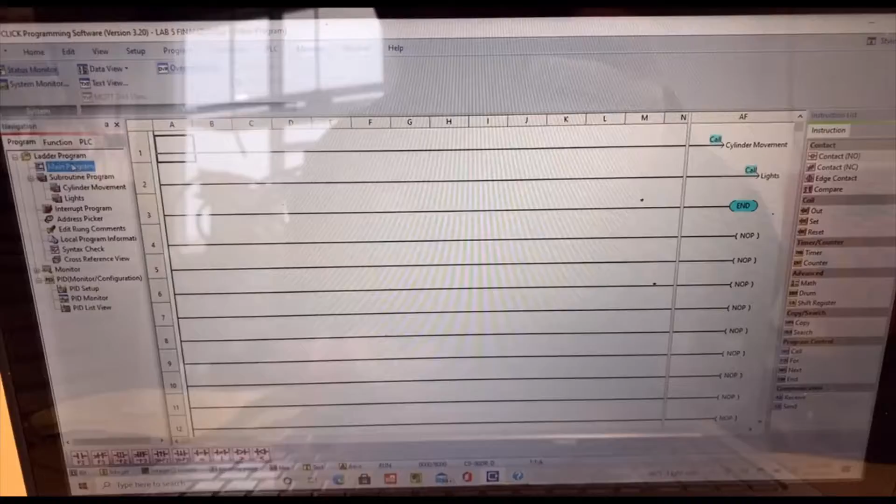This is Mech 160 programmable logic controls. We're going to press both buttons and run the system. Now we're going to look at the code. Our main program just calls both of our subroutines, which are cylinder movement and our light subroutine.

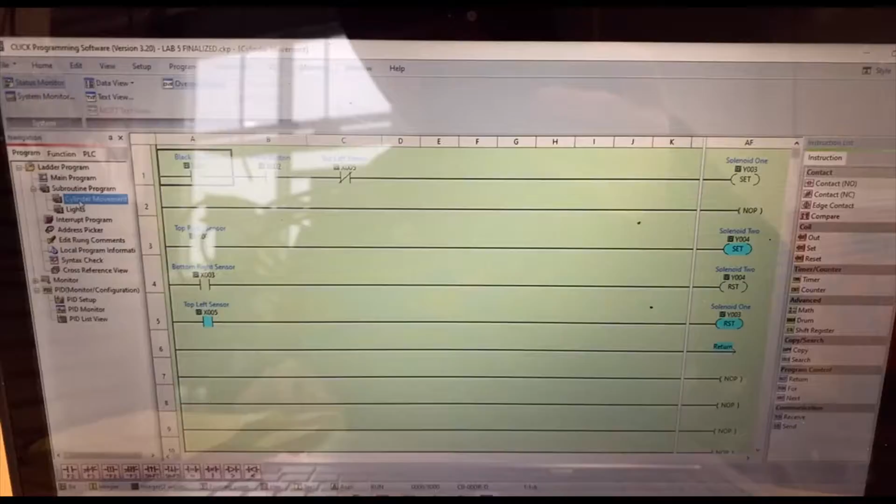Once we press both buttons, which I'm going to do, we can see that it activated the first two buttons. And what's happening when we press these buttons is the relay switches to normally open. This sets the first solenoid on, which then raises the actuator number 1.

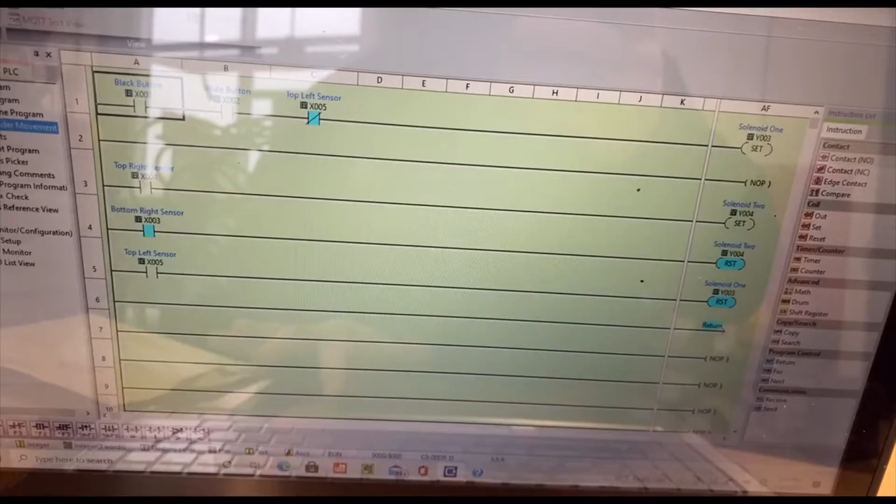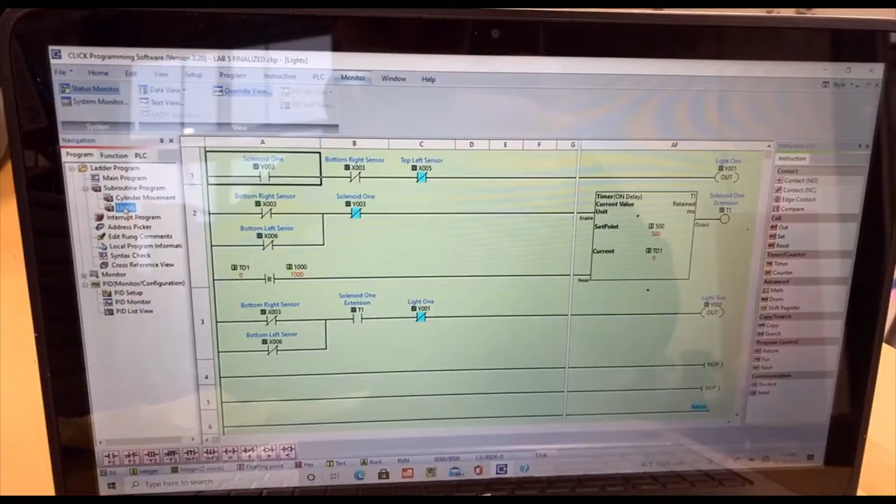Then the raising of this actuator causes the bottom right sensor, which is seen here, to become normally closed. The right sensor being normally closed actually causes the light to become true and turn on. Switching over to the light tab of the subroutines, we can watch this occur. And as we can see, it's solid and it's true over here as well.

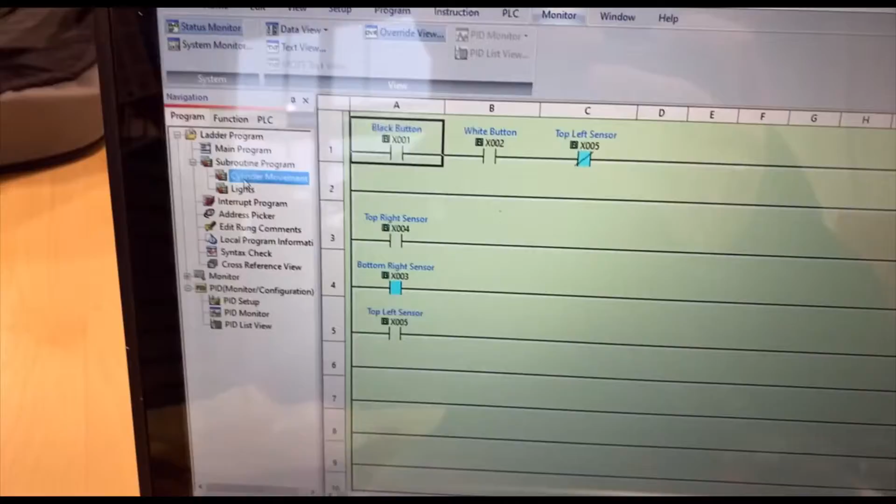And now once actuator 1 reaches full extension, this sensor right here, the top right sensor, starts to activate actuator 2. And we can actually watch that occur real quick. There it goes. And now we can see once actuator 2 fully extends, its logic becomes false, deactivating the solid light.

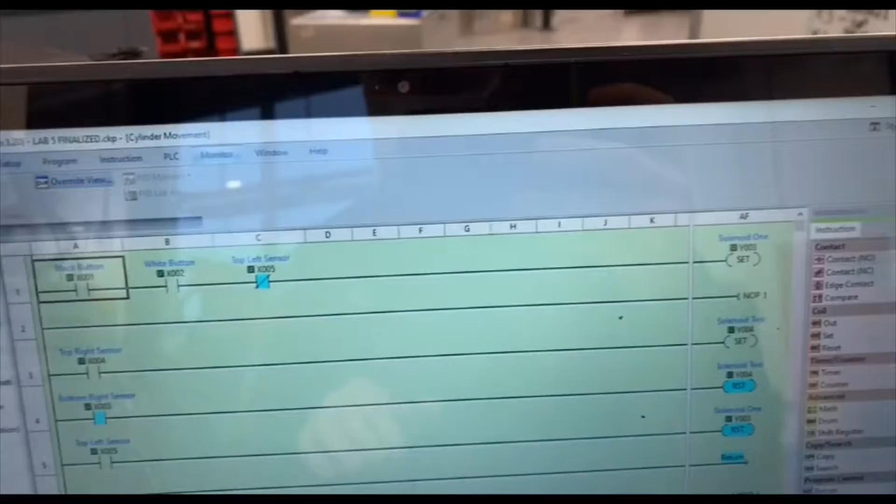Now once this top left sensor is activated from the full extension of actuator 2, it actually tells actuator 1 to begin retracting. And this actually activates this blinking light feature due to the solenoid being de-energized. We can see that occurring as well over here if we go to the lights.

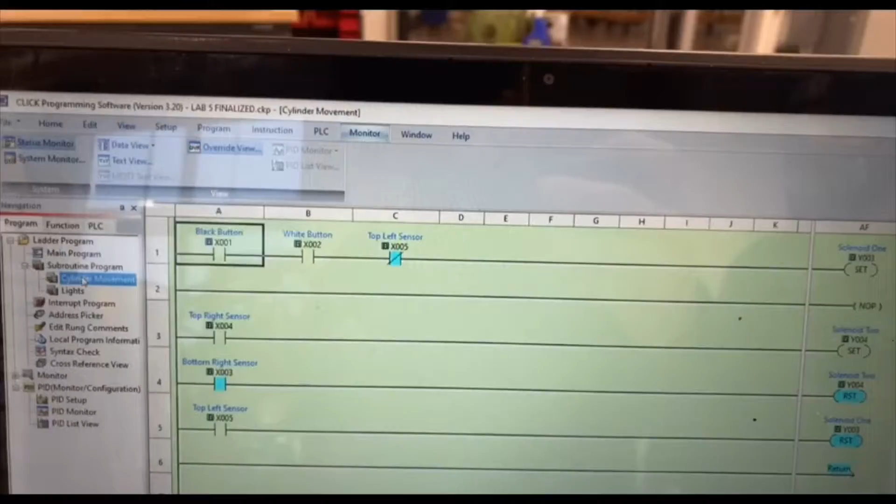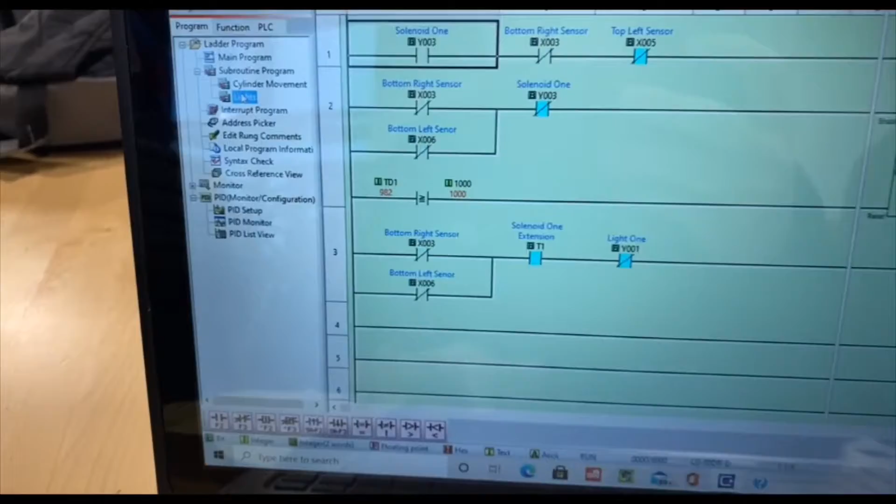So here we can see this top left sensor is connected to this reset. When the top left sensor is activated from actuator 2's full extension, it begins to retract actuator 1, as we can see occurring, which actually activates this blinking light due to the de-energizing of the solenoid. And we can see that blinking light occurring here in our light section.

A very simple way of looking at this light subroutine: the solid light turns on when the first actuator goes up and continues until the first cylinder goes down. This is kind of what indicates that it needs to go down.

And if we want to take a look at some of the hardware used here, we've got, of course, our PLC running. We have our lights, our buttons, which are switches in a sense. And then over here, we actually have relays. Relays are going to be powered by this power supply. The reason why these relays are being powered by the power supply is because the PLC does not have enough power to actually engage these or the solenoids.

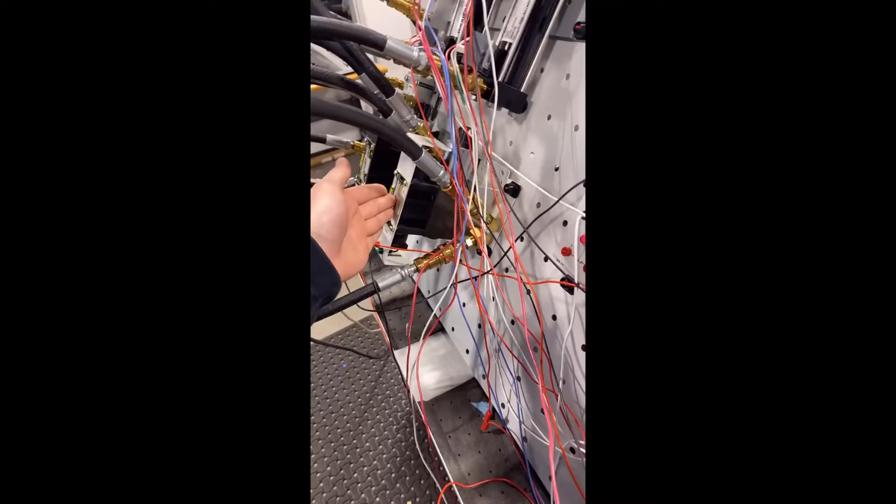Over here we have solenoids. We have our actuators in the form of cylinders. And of course, the power supply on the back, as you can see. We have a flow control on our hydraulics over here, and then just some manifolds just to get some connections. We have our sensors, and our sensors are wired a lot like our relays were.